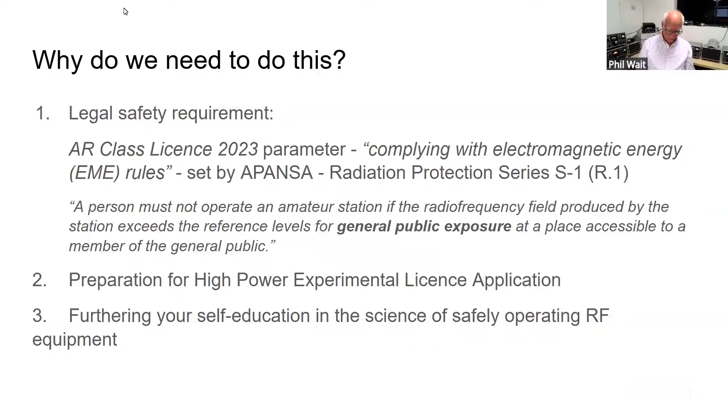Okay, now you want to put up the next slide, Justin? Done.

The EMR assessment. Okay, what we've done at the WIA and through the Education Committee, and I don't know how many of you have seen the Education Committee website, but we've put together a flowchart that makes it simple to do an EMR assessment on your station. So basically, what you have to do is to assess the EMR radiation risk of your station for all transmitters, all transmitting antennas, all frequencies of operation, and at the highest transmitting power. So that might sound like a lot, but we've put together a flowchart which will help you do that.

And what the flowchart will tell you is, is your station a high-risk station or a low-risk station? Or also, do you need to worry at all? If you're a foundation licensee, or if you're a mobile station, you don't need to worry.

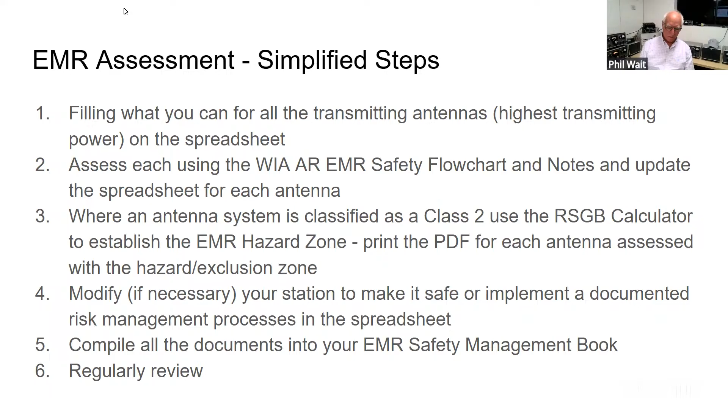However, a lot of you guys have got very complicated stations. You've got about 5 different transceivers, 100 different antennas, and you operate on everything from DC to daylight. So that becomes a bit of a recording problem. So if you go to the next slide, Justin, sorry.

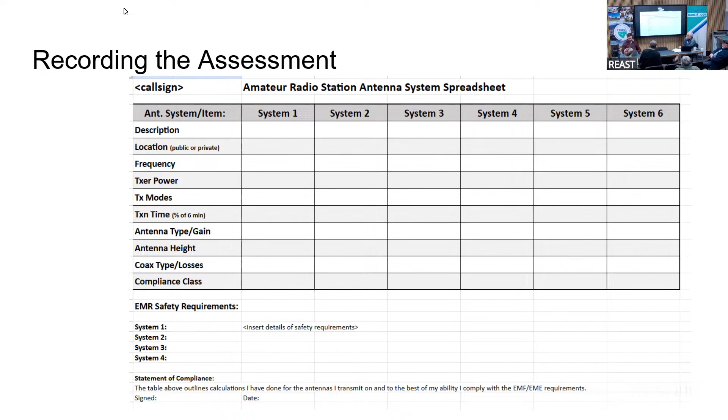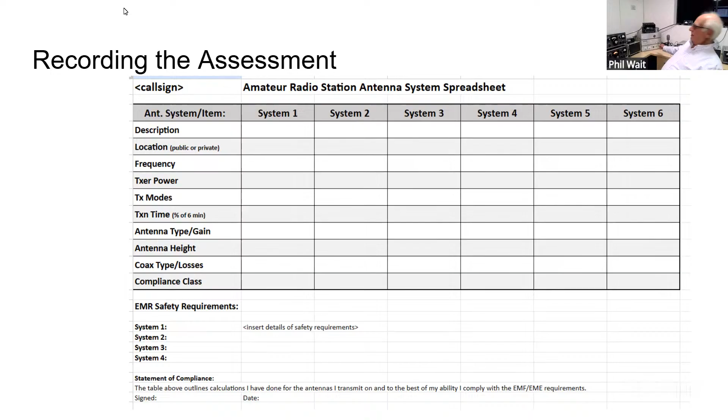Just come in, Bruce. Can we ask a question? Yeah. Hang on, Phil. We've got a question from the floor. Yep. I'm just wondering how much power you're transmitting into your loop. I'm transmitting 100 watts on AM. Peak or average? 120, I think it is, isn't it? But I can go more. If you look over here, there's a Class E transmitter sitting behind me with a Class D modulator. Featured in our magazine. Yeah, that's the one. That'll go up to a kilowatt peak. Which on AM, if I wound it up, would be what, 250 average or something.

Okay, now what we need to do is we need to be able to record these results and keep a copy for our own use, and also so we can prove that we've done these assessments. And so if we do get a visit from a Commonwealth officer, we can show them that we've actually gone through the process and we've determined our station is safe.

And this spreadsheet was put together by John, VK4JBE, and BDARS, the Bayside District Amateur Radio Society in Brisbane. And you'll find across the top there's a number of systems, and each one of those systems is a station configuration that you would use. So you might use a transmitter into 3 different antennas, perhaps depending on the band, 3 different bands or 6 different bands, and you can build this out as much as you want just by making more copies. So you put down in each of those columns the system that you're likely to use on any particular frequency, on any particular band.

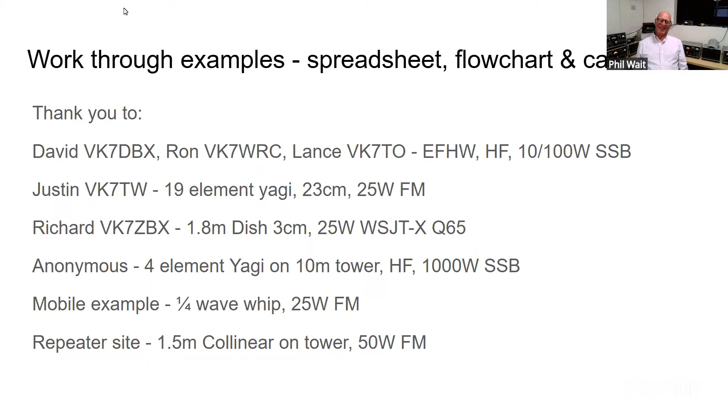Well, I don't know whether you've got significant winds up there, Phil, but we have significant winds that I'm hearing outside right at the moment. No, it's a beautiful day up here in Sydney today. But my son lives in Hobart, so he'll be copying it.

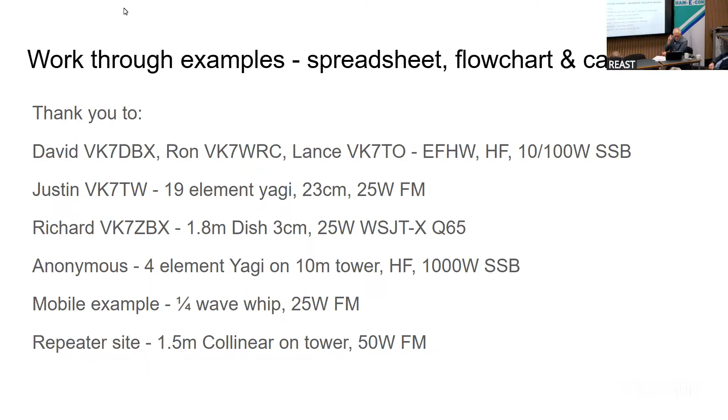Yeah, well and truly. So now I'm not intending to go through all of these. What I've done is use the spreadsheet that Phil outlined earlier. Been through each of these, but there's a couple of these that I actually want to go through and work through as a worked solution. So the very first one, and thank you to David, who I think's online, and Ron, and also Lance, who put in the end-fed half waves.

Now, David and Ron both gave me 10 watts as the maximum amount of power. Can I just say that's compliant? It's compliant from the start. It's class 1. It'll come up green, and I can show you. It comes up green on the EMR calculator.

So if you go through the flowchart, and the example that I'm going to show you, which came from John, VK4JBE, he actually has printed out the flowchart 4 times and gone through and circled each bit and actually written on the flowchart the particular system and the antenna that he's assessing, and he's included that in his little manual of assessment. So for 10 watts, it's compliant.

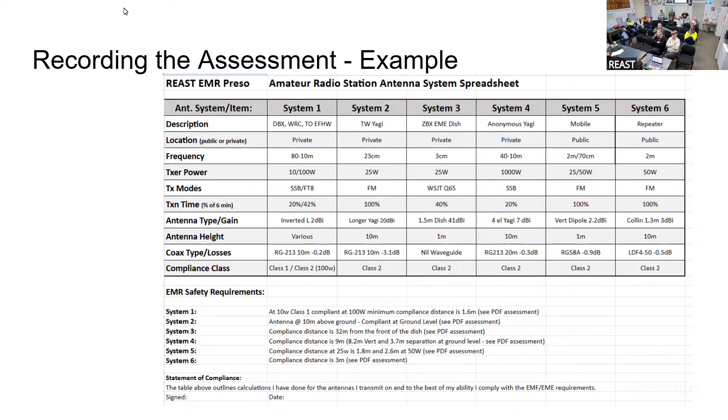It's quick and easy to do once you've got all the parameters in. The other thing that changes that is the TX mode, because you'll notice I put in here SSB/FT8, and there are a whole range of modes available in the calculator. I'll show you those in a sec. But there is a difference, because at SSB, the TX time that it automatically puts in there is 20% of the time, whereas for FT8, it's 42%, not 50%, which is what I thought it would be.

And then if you were to go, in Phil's example, to AM, it's 100%. You've got a carrier all the time. And if it's FM, you'll notice all of them are 100% for FM. But that's assuming you're transmitting in blocks of 6 minutes.

Oh, correct. And don't incriminate yourself, Greg. Been known to waffle, but 6 minutes every over is probably.

Can you hold that thought? Because there's an interesting little nuance in the calculator, and I'm not sure whether I'm using the calculator right or not, and I'm interested in people's opinion. So I'm interested in the polarization affecting the figure? Well, polarization is interesting because up in the microwave bands, polarization does present other exclusion zone parameters. Okay. So, are people comfortable with that? I'm happy to run through it if you want me to.

Shame it doesn't have the EIRP at the bottom of each column. Well, we can do it if we get time. I'm conscious of time, and I was just going to do a couple of these so you can actually see, and we can play with the parameters when they're in there. So the next one I put on there, which is one of my antennas, is one of wonderful Rex's 19-element Yagis on 23 centimetres.

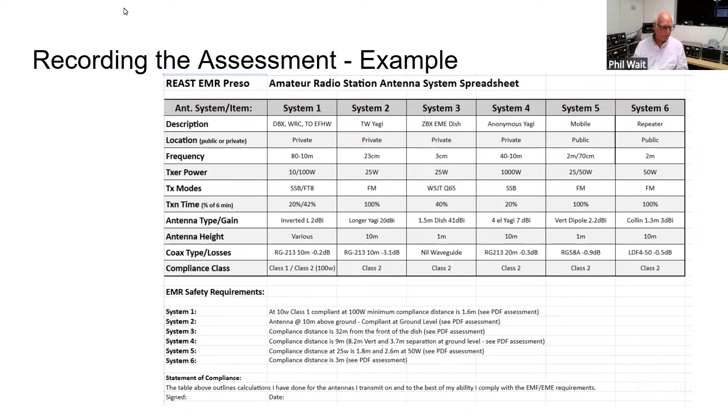Well and truly. Yeah. Okay. Yep. Put a rope around it at whatever the exclusion zone is. Well, if you've got your antenna up against a fence, move it away from the fence. Correct. So many metres. Well and truly.

Yeah. So would that mean that my centre fed dipole, that I have the ends at the end of the fence tied to the fence, inverted V, and there's a walking track behind my fence, does that make me non-compliant then in that case? No, your Foundation. You're 10 watts. 10 watts maximum. Even though there's people walking past. That's right. Hold on. Go through the 10 watts, you're compliant.

It's still compliant. Why don't you go through the thing, Justin? Yeah. Okay. I'll go into it, because it's much easier to show you. Let me just find it. It actually looks more complicated than it really is. Oh no, and spot on.

Because I was panicking because I've got a microwave Yagi that's on my deck, and it's about 2 meters away from one of my operating points. So I was panicking. So it's sideways, so there's nothing coming out. This is well within the limit. This is a calculator. So you'll notice I have put in here. This is actually an anonymous Yagi.

So we've got 40 meters. 40 meters you put in here. It chooses a frequency in there. It's single sideband. Automatically, it's saying the mode factor is 20%. Transmitter power is 1,000 watts. Now, transmit percentage in 6 minutes. Now, I've assumed in most cases in the calculator that if the mode factor is 20%, the transmit percentage in 6 minutes is 20%. Now, I'm open.

No, that's not right. That's not right, because sideband isn't a carrier wave. Okay. Yes. And that's where the 20% comes from. Yeah, so the amount of energy in the transmission is about 20% of what it could be. It's like having a 20-watt carrier. 100%. That's okay. Oh, we can go past 50%. You talk for 3 minutes and listen for 3 minutes. What's the thoughts? Not you, mate.

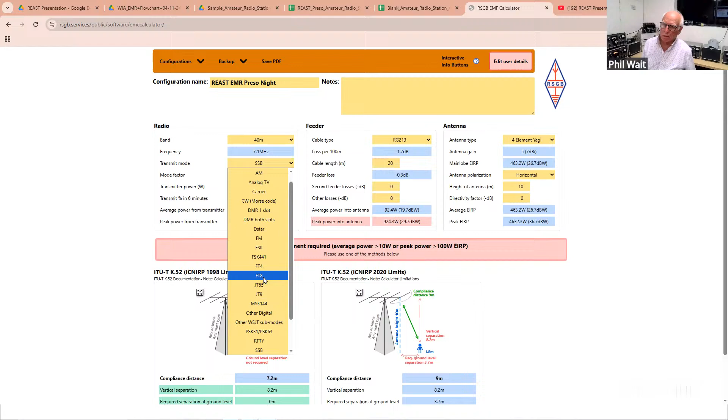If it's a one-to-one conversation. Just hover over that again. Interesting. It says that for WSJT you use 100%. Mode factor. No, this is transmit percentage in 6 minutes. I would have thought that was the. It comes up automatically with 100%, and it then allows you to vary it. But you'll find it'll assume 100%. So FT8, 42%. Yeah, but if you hover over that, it's saying that 42% is based on the fact that it's only transmitting on period. You don't usually transmit for 6 minutes straight on FT8.

And if FT8 and FT4 are 50%, I would put in 50%. Yes, that's an error. I might be looking at taking into account spectral density for the mode. Okay. But the average power during a transmission is 100%. If you run FT8 for 6 minutes, you wouldn't be transmitting for 100% of the time. No. That's 50% of the time. That's right. But the mode factor should be 100%. Let's do worst case. I agree. Worst case, 100%.

So transmit percentage in 6 minutes. On SSB, well and truly. And you probably only transmit for 42% because it's the time when it receives at the end of each period. Correct. So that's how they come up with the mode factor of 42%. Which they haven't done quite right, but yeah.

Okay. Now, feeder, I've assumed 213, 20 meters of it, and at those sort of frequencies, there's not much loss. So it drops a little bit here. 4-element Yagi, 10 meters up in the air, horizontal polarization. And I haven't put in any of the other parameters. You'll notice it says, yes, it's class 2, so it's red.

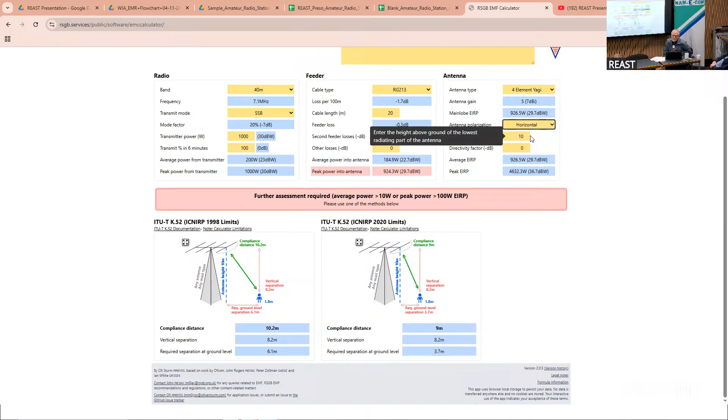If you drop the height of the antenna down... I'm surprised that they're taking into account the general public, but they're not making any allowances for members of the family. Yeah, we'll talk about that later. So, okay, basically it's saying you have to be further away from it, but you don't have to be as high. Well, you're the same height. Well, yeah, sorry, you need to be further away.

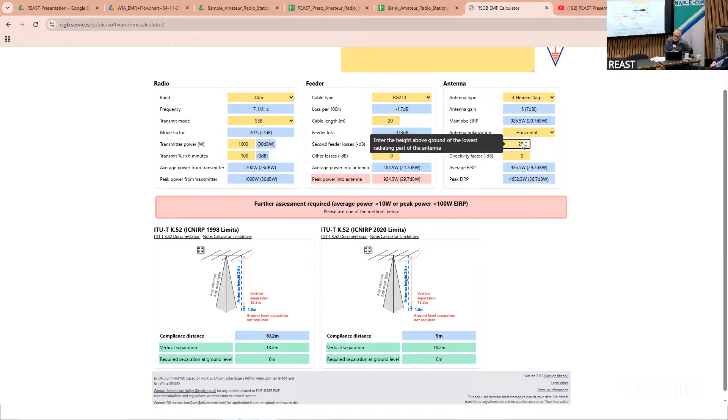And you'll notice these have changed colour, because if I go to 10 metres... That's 100 metres. Jesus, that's a big tower. 10. Well, if I go to a 20 metre tower, you'll notice these have changed to green. Intrinsically safe. So that means you can be directly underneath it, unless you're 7 foot. Whereas for a 10 metre tower, you actually need to be 3.7 metres further out from the tower. So the exclusion zone is a 3.7 metre radius around the tower.

Now, for most towers in the backyard, that's probably achievable. You'd have a fence in the backyard, maybe a gate. What about the council rules about a 10-metre tower? Well, most councils allow 10-metre towers. Do they? So long as the 10 metres is not 10 metres higher than the highest part of your roof. That depends on whether it's attached. It's a minefield, can I just say? So not going to go there.

But can you see, with playing with the parameters, how you can then work out how you can actually be compliant in your location? So, any questions that I can show you with this particular setup? Well, with a Yagi, presumably the side lobes are going to be less. Okay. Before you go, change this duty cycle from 100 to 50. Yeah, what does that do? Transmit in 6 minutes takes 3. The software plots it so you get an actual.

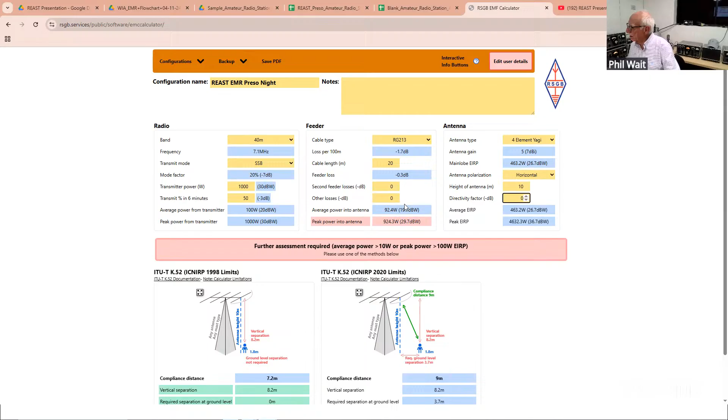So can I just say under antenna types, that's an excellent segue, Phil, because there is the reference antenna of 0 dBi, which is effectively your isotropic radiator, your reference antenna, and that's at the top of all of the lists. Just to show you, this is 40 meter HF antenna. You've got 2 element Yagis, delta loops, G5RVs, half wave dipoles, inverted Ls, which is what I use for the EFHW, log periodics, long wires, even mag loops actually, which is fantastic because I put them in to work out mine.

So if I change this to 2 meters, so we go up in frequency and I pull this list down, you'll notice that we've still got the Yagis in there. We've got longer Yagis, collinears, half-wave dipoles, rubber duckies, slim jims, etc., as well as the custom, which is at the bottom of every list. So what Phil was saying earlier is as you change your frequency, it also adjusts the most commonly used antennas for that particular frequency.

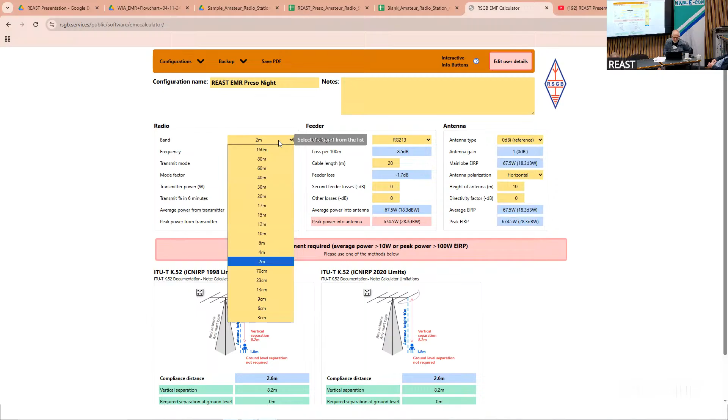So the last one I was going to do is a little bit controversial, because Phil mentioned earlier that under the flowchart, it asks questions about whether you're mobile or not. Now, we won't run 1,000 watts mobile, we'll run 25 watts mobile. Leaves that at 50% or 51%. And we'll run FM, so key down full power. We're probably running not quite as long a piece of RG58, so there's a little bit of loss there.

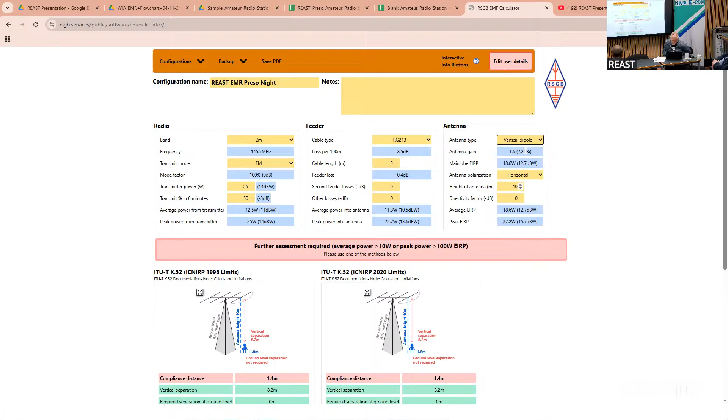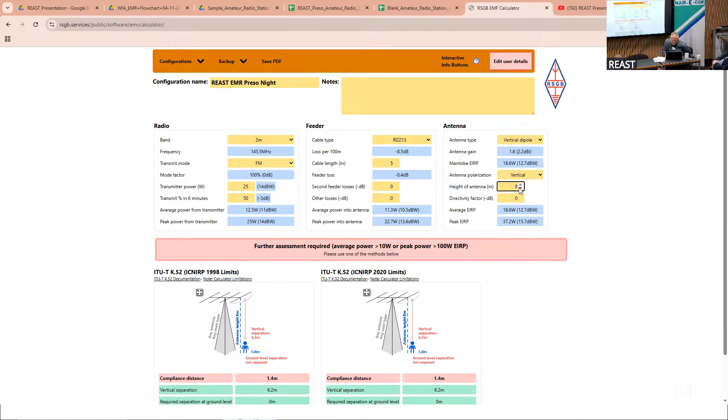And we go to vertical dipole. That'll do. Effectively a ground plane. And it's vertical. And it's not 10 meters above the ground, it would be a meter above the ground. Oh. Did you tell us it was mobile? No, because there's nothing around it being mobile or not mobile. Change the vertical dipole to something with a bit of gain, though. Change it to a collinear. Yeah. 1.3 collinear, which you could have on a bull bar. You've still got a separation of 1.5 meters.

I have a radiation detector supplied by work, and all the way around work, it doesn't register at all. I sit in the vehicle and key up my radio, and it goes to 200%. So when it says mobile is intrinsically safe, not for the operator. But that's 2 meters. Well, 2 meters, 70 centimeters. Okay, it's a 70 centimeter collinear. That's 10 meters, I'm buggered. It's actually more. You need 2 meters of separation.

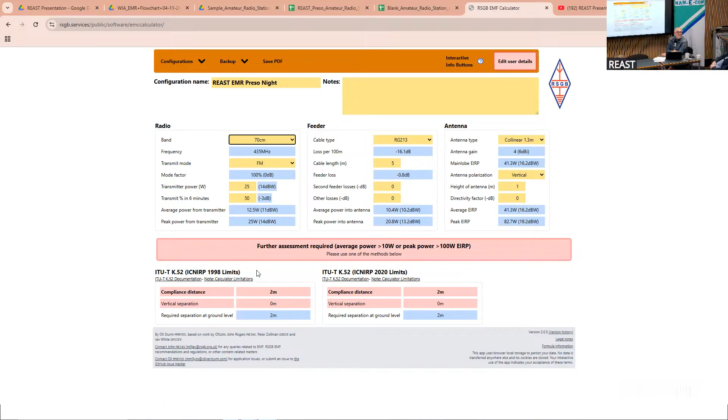But one of the key things with mobile operation, to do mainly with the public walking past your car and your bull bar, is you can see them and stop transmitting. Remember the limits for an aware user are quite a lot higher than the limits for the general public. Sure. It's about 5 times higher. It rings a bell. Quite a lot higher for a tower worker over general public. So then it becomes, what's the definition of an aware user? Certainly the operator's aware.

Is the passenger of a vehicle aware? Who knows? I'm a sailor, so I often think about the person on the wheel, standing just in front of the backstay, with 100 watts coming out of it. So when you say 5 times more, Phil, does that mean that this calculator's got a large safety margin built in?

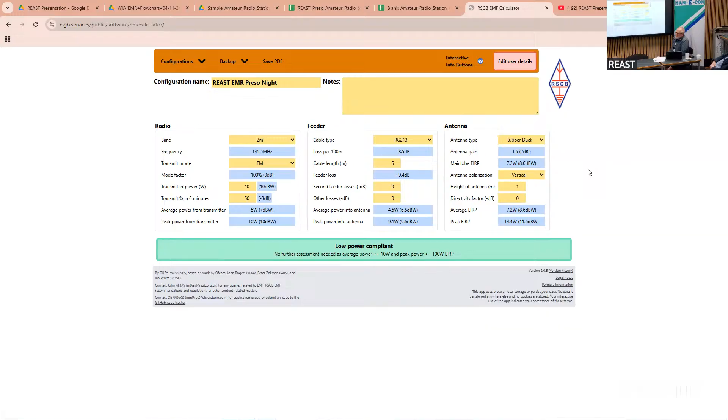The ARPANSA standards have got a large safety margin built in, all those ITU standards that they're based on. There's a large safety margin in those standards. It's assumed that the tower worker has a lot more RF knowledge about being in and out of those danger areas, radiation patterns, et cetera. They also carry dosimeters with them as well. Well and truly.

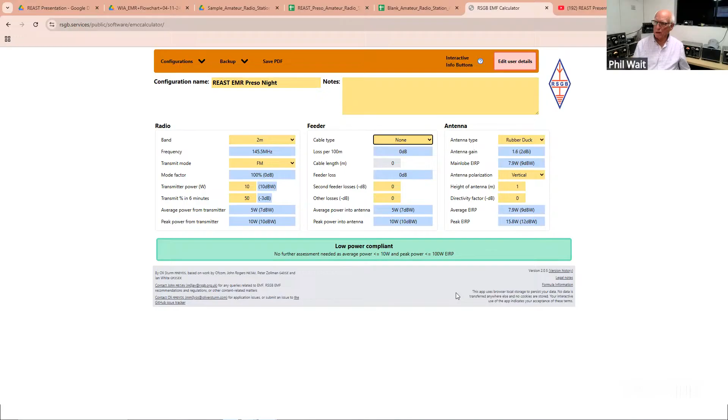There's also different standards for different parts of the body. For instance, the exposure to the head from a mobile phone is a lot higher actually than the general whole body exposure. And what I put in here is a 10-watt handheld with a rubber ducky antenna. Now, I don't know whether there is a 10-watt. I know there's an 8-watt. There is a 10-watt. And is that compliant? 10 watts. Yeah. There's no exclusion zone. There's nothing.

And the most susceptible part of your body is your eyeballs, followed by your gonads. But it's worth pointing out that if you follow the spreadsheet, you would never get here for a handheld. I think a lot of the scenarios we've been speaking about, you would never get to the calculator to start with. Correct. Especially the distance one as well. Like, is your antenna 10 meters away from the nearest accessible portion where the public can be? And if it's not in the middle of your backyard, then you're compliant.

And the mobile option here, you get down to, are you a mobile station using 100 watts or less? Yes, green. Someone might want to run a kilowatt mobile. That'd be interesting. Key down and stall the car. And that's an ACMA decision, basically, my understanding. It's basically built on practicality.

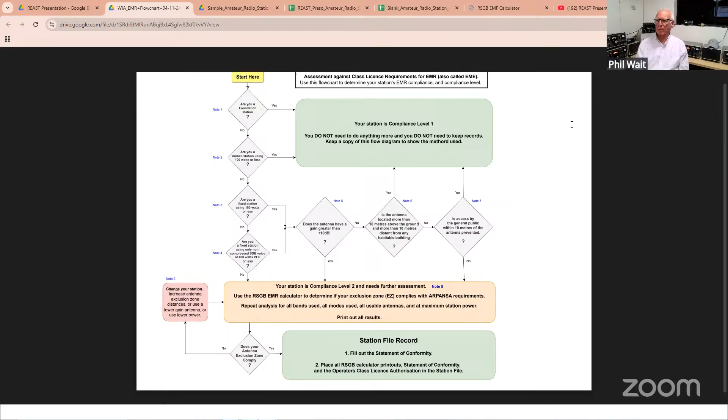So, any final questions about the calculator or the flowchart? The key thing I'd ask, and what we'll do is in the video description, we'll put in all the links to all of the various bits and pieces that we're showing you. Have a play. Please, please, please have a play, especially with the flowchart. And if the flowchart puts you into the calculator, have a play with the calculator, because it tells you an awful lot of things.

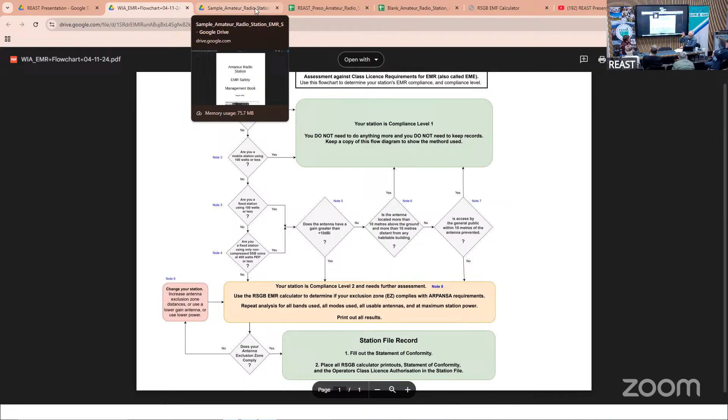Once you've been sent off to the calculator and you do the calculations, you then take those parameters. That PDF was one thing I was going to show you, sorry. If you get to a point where you go, okay, that's where I am, you can save this as a PDF and it saves off exactly what you've just done and tells you it's compliant. And the notes? You didn't put any notes in. Correct, unknown user. If I put in the user and the other stuff, it all appears at the top, so that you can then grab it and put it together.

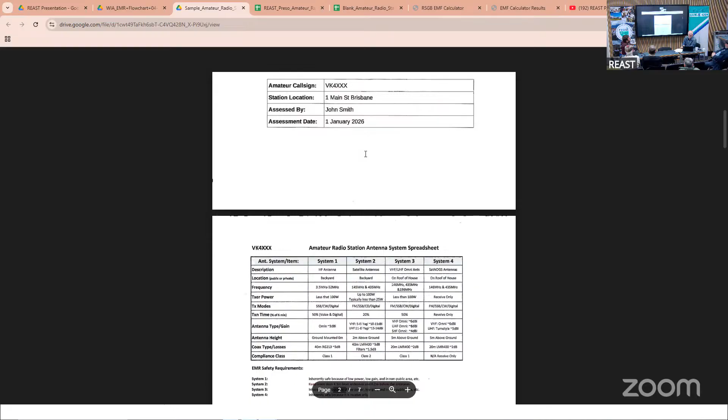And what I've got here, John VK4JBE supplied a fantastic example. So he's got a cover sheet that says the EMR Safety Management Book. And can I just say, John works in Telstra, in mobiles, and is involved with EMR measurements around their mobile facilities. So he comes with a high degree of experience here. So he's put this all together. You'll notice, here's his spreadsheet, and he's put a whole lot more information in here.

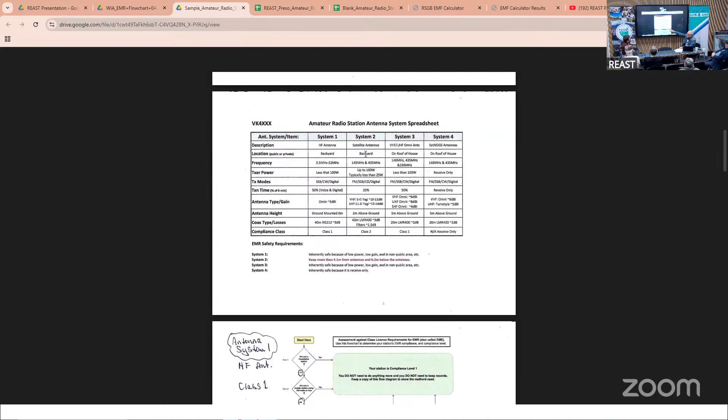And you were talking about a multi-band antenna for different frequencies, so VHF, UHF, SHF. And he's put in each parameter for each of those frequencies, etc. And then, importantly, what the safety requirements are so that he can comply, down the bottom. And then he's put the flowchart in here, and he's keyed out the flowchart by hand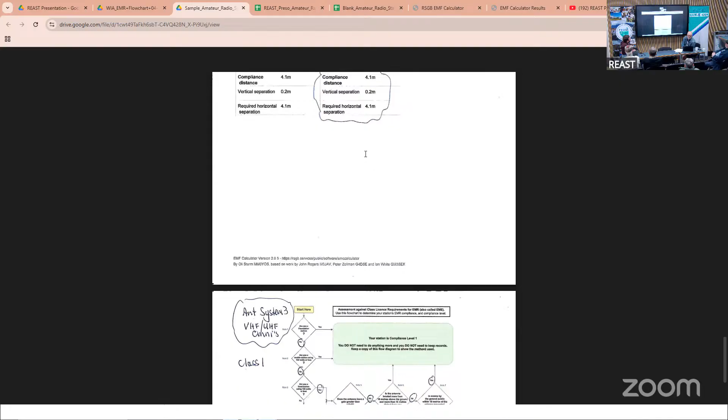So that was the VHF. He's done it for the UHF, and he's then done it for the system 3, which is class 1. It's compliant. And he's put all of this into one document. And if you want to see a really sexy document, ask Lance, because Lance has put pictures and all sorts of stuff in there, and the 590 is sort of highlighted.

It's got these big lights around it. Sorry, old joke.

And he's put it all into this book, and that's the thing he can show. If somebody turns up and says, "Okay, I'm worried, are your antenna systems compliant?" That's what he can show them, and he's done the calculations and used the calculator and the flowchart to get there. So yeah. I guess a lot of that has to do too with your own education about, if you're running FT8, how much power you actually can run to be compliant. You might not have an antenna that's perfectly compliant that you can't move, but you could reduce the power down. Well, true. To 20 watts instead of 100 watts or something like that.

Spot on. And that's how you tell that you're compliant. Do the calculator and find out, and you may need to drop your power. If you can't actually move things, or you can't actually create an exclusion zone, you may have to drop your power. So yeah. Where do you get the calculator from?

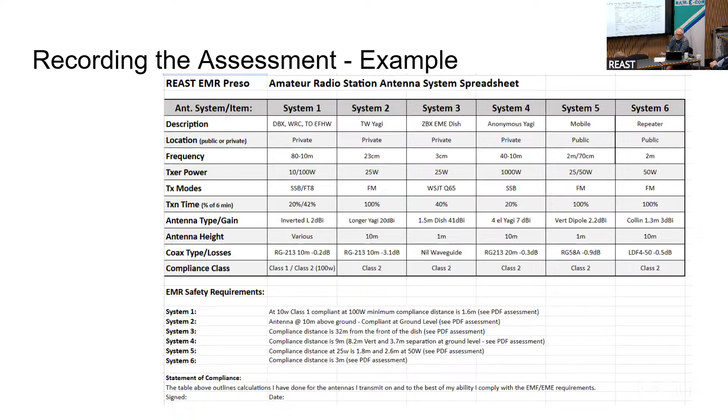Correct. So if you're a terrestrial 10 gig station, it'd be different. Oh, yeah. Well and truly. Especially if you were operating on one side of a road and cars were driving in front of you. That's not perfect. They're not going to be there for 6 minutes, are they? Something like Mount Wellington, for example. So

Thoughts on exclusion zone. Interested in what people think. Well, I can run an electric fence on my property boundary with no signage or anything, and that gives people a bigger boot than the RF's going to give you. Don't try to stay there for 6 minutes. Carefully, but anyway. I think one of the problems you've got with signage, though, is if you put a sign up, instantly some neighbours will go, "Oh, hang on, you're causing all my problems."

I think the general acceptance of permitted entry to a property is from the front gate to the front door, shortest route there. If you go down the drive, you're likely to meet a dog. If you go around the other side, you're going to fall off the unbuilt pathway and do damage to yourself. Yep. So common sense is front door, callers can come there, meter readers can come there, or whatever, but elsewhere it's trespassing. So I think that's exclusion.

Well, if you look at what exclusion zone is normally taken from a code of practice, because if you look at where this will end up going, it's going to go somewhere where there'll be some sort of legal definitions and everything in it. And an exclusion zone, it doesn't actually define what makes the exclusion. It can be barrier type. Normally what comes with that zone is signage, which clearly delineates, hey, do not cross this boundary. So it's going to be something with signage. Long term, I could see what that would be. You can't read. So do the regulations require you to state how your exclusion zone is maintained? No. And that's why the jury's out.